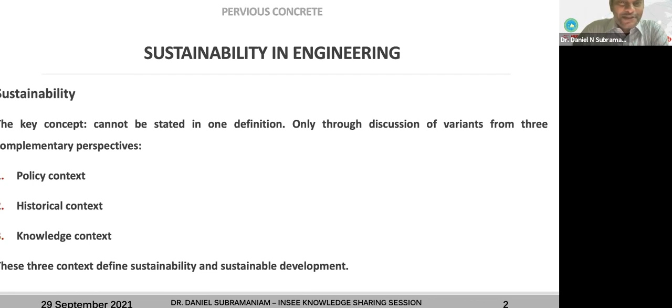So we speak about sustainability, and sustainability is usually spoken of in 3 contexts: the policy, the historical, so how we have developed so far, because we have always been developing from the days that we were hunter-gatherers, and then the knowledge context. Whatever we're going to discuss will be based mostly on the knowledge context. These are the aspects of a modern society, so we have to manage all this. We can't exist in isolation compared to, say, 4 or 5 centuries back.

So we do have markets. We have flow of materials, we have flow of energy, and then we have long distance and overseas trade. Then we have a financial economy, so we had to base all our improvement on that. And we actually felt it with this COVID-19 situation as well, how we came to a standstill because of the economy coming to an end. And then the manufacturing processes, and we rely a lot on the mining process as well, so resources, and the development of new technologies.

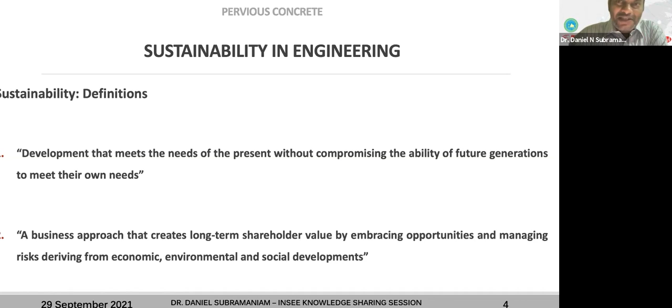And it's not only just developing new technology, we also should be able to share it with the community and the businesses and industry so that it can be implemented. So this is by definition, so I'm not going to dwell a lot on this. So sustainability means that we have to think of our future generations, and they should be able to enjoy the environment as much as we enjoy it. So that's principally the same.

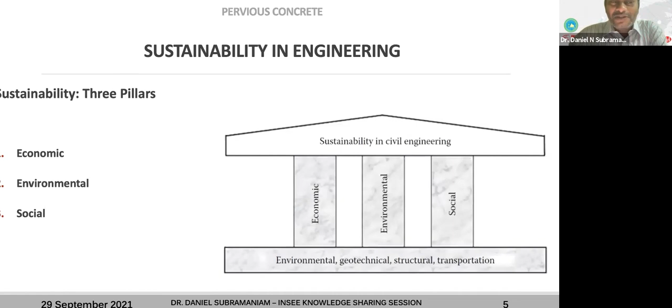And when it comes to sustainability, there are 3 pillars: economic, environmental, and social. So I will be mostly talking about environmental and the economic, but not even economic much. So we'll be talking a lot about environmental sustainability. And I could get this actually from the IESL Code of Ethics. So not only IESL, if you take even ICE or ASCE or wherever, sustainability is actually intertwined into every code of ethics that is available for engineering professionals.

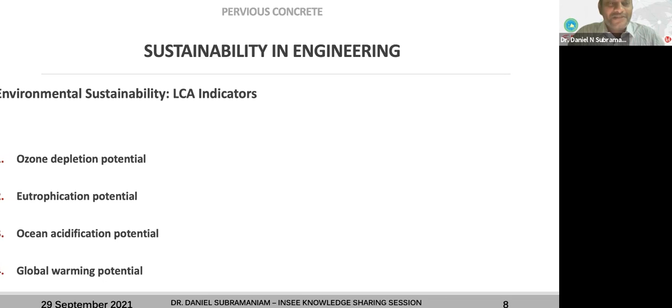Right. So when it comes to environmental sustainability, there are 3 tools that are usually used, which are life cycle analysis or life cycle cost analysis, then ecological footprint and planet Earth system. And out of this, we have common indicators. So usually they are calculated based on the ozone depletion potential, eutrophication potential, ocean acidification potential, and global warming potential, of which the global warming potential is mostly spoken about, which also depends on the carbon footprint. So we will talk a little bit about the carbon footprint of pervious concrete at the end, but I will not be able to talk about the other 3 indicators in this session.

Right. So about green materials, the reason why we actually should go for a green material is to reduce the impact on the environment. And usually it's a comparative analysis, because you can never make anything zero impact. So whatever you do is going to have an impact on something. It could be a positive or negative impact, but there has to be some kind of impact exerted on the environment. So what we actually go for is a comparative analysis, whether concrete is better than clay brick, or whether conventional concrete is better than recycled aggregate concrete. So something like that. And then the examples, so recycled materials, materials obtained from sustainable sources, or lower environmental impact materials.

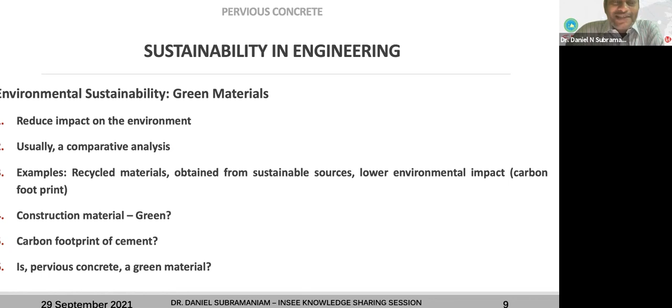And then construction materials, are they actually green? So I have been to many of the sessions of INSEE in the past, and every time they really emphasized this one. And also most of the cement companies emphasize that cement is supposed to be the bigger pollution contributor in the construction industry. And so INSEE has also actually put forth a lot of hydraulic cements, which have a much lower carbon footprint compared to OPC, or ordinary Portland cement. So the carbon footprint of OPC would be somewhere around 1 to 1. So 1 kilogram of cement would have around 1 kilogram of carbon dioxide emission. So is pervious concrete a green material? That is what we are going to look at.

Right. So as I said in the beginning, water sensitive urban design or low impact development is a new concept that has emerged from, I think, the millennium. So around 2000 or 1990s, around that. And what it aims to do is it focuses on the hydrology. Most of the time it focuses on the hydrology, and if you're undertaking a development, then the hydrology of the catchment should be made as close to what it was before the development.

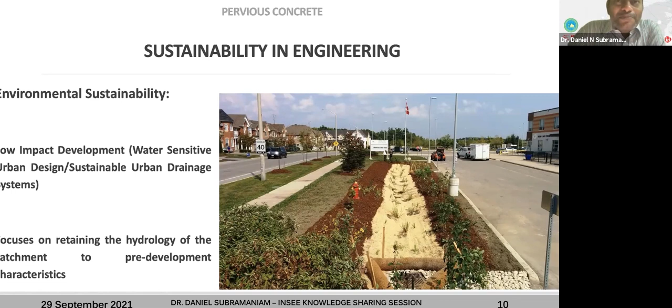And a lot of the streets and pavements and car parks, all of them are made of pervious concrete. So we will actually get into that. So what is a pervious concrete?

Yes, so in my definition, I have almost 0% fine aggregates. As Mr. Jan Koenig said in his welcome speech, sometimes they actually put a little bit of fines in there. That is to enhance the compressive strength most of the time, but that affects the permeability a little bit. So in most cases we want to go for zero fines. We don't use fines at all, no sand at all. We just use cement and aggregates, we mix it with water, and we make the porous concrete or the pervious concrete.

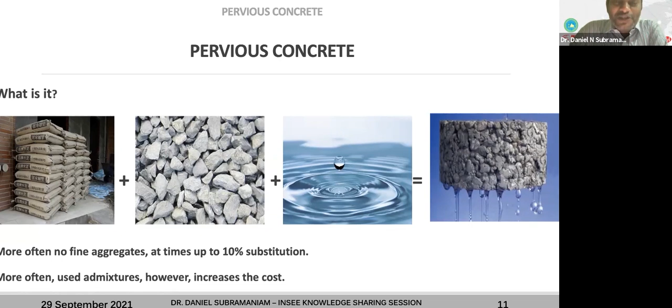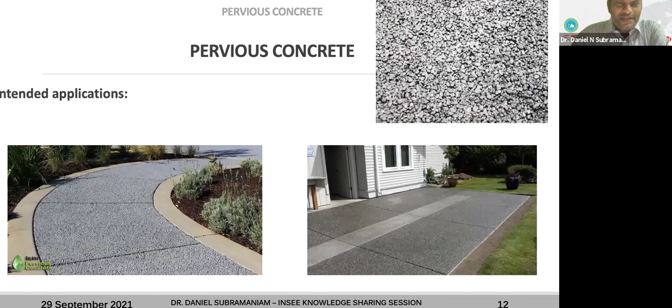So the good thing about this is that you can customize it to any application that you want. That is what we are going to look at today. So these are some typical textures of a pervious concrete. I think that is mostly made of about 5 to 10 millimeter aggregate size particles. And then we have some applications: driveways and lawns, parking spots and byways. And one of the most interesting ones, which I have not seen much of even on the internet, is retaining walls.

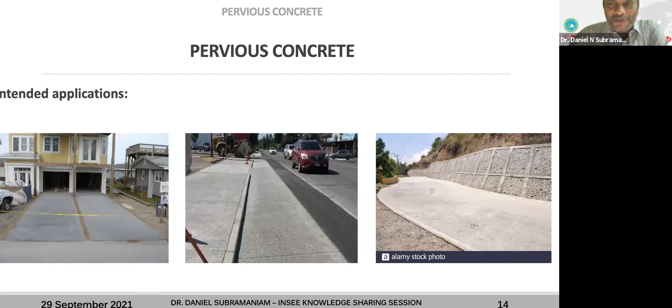So usually we do a conventional concrete retaining wall, and then we have Eslon pipes jutting out to drain the water. I remember one of my friends telling me, though I couldn't find it now, that in some places, even in the south, in the Matara area, people have opted for retaining walls using porous concrete, pervious concrete. But then we have to talk about the designs a bit when it comes to very high, tall pervious retaining walls.

So the primary intention why pervious concrete was developed is to increase the permeability. It is more of a hydrology-related application, right? To enhance the permeability of otherwise impermeable urban surfaces, then reduce flash flood frequency and volume, because if you have a permeable surface, you will reduce the runoff, and that will reduce the flash floods. And then increase the recharge of groundwater. This is one of the most important things.

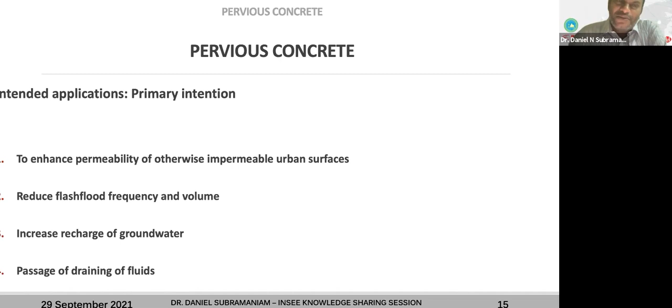If your groundwater is falling, that is going to affect the stability and also the water resources. So we need to have the groundwater, and we should not be altering the groundwater table a lot because of our development. And then the passage of draining fluids. Now, these are some of the other applications which have the potential of using pervious concrete. Out of these, I think I have used about 2 in my research, which are still under analysis.

So we can use them as non-load bearing structural walls. You can design it in such a way that you compromise on the strength a lot because it's non-load bearing, and you increase the porosity, so it becomes very light. That can also act like thermal insulation, because of the many cavities inside the porous concrete of the wall. Also, they can act as noise absorption walls. There are already a lot of research papers on noise absorption on roads, because with the rough surface the noise emanating from the tire-road movement is reduced a lot. So acoustics-wise it is also better.

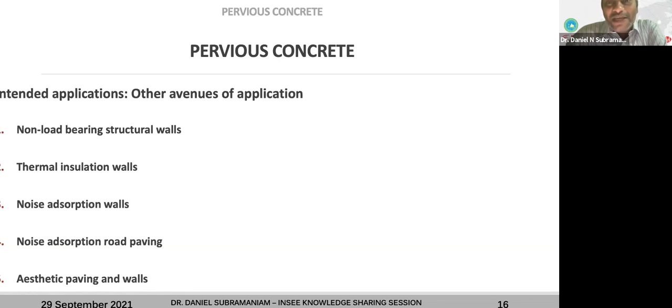And for thermal insulation, we have done research, so we have data, but I'm not going to discuss it today. But it shows some promise that it can reduce heat transfer. For example, you can use it as a partition wall and maintain 2 different temperatures in 2 different rooms at the same time, so you don't have to worry about heat transfer through them. Okay, so the general observations.

You can come up with a compressive strength varying all the way from 1 megapascal to about 120 megapascal. The flexural strength can be around 0.1 to 20 MPa. That all depends on your design, so we will be discussing that a little bit. Then the porosity, the most important factor in a pervious concrete, which can vary from 5, and sometimes, in my research, all the way up to 45%. So that's a huge volume of pores inside.

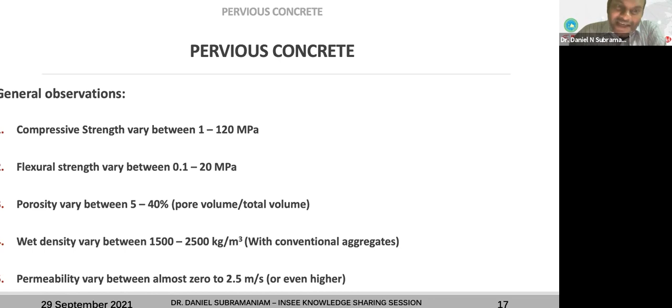And the wet density can change anywhere between 1,500 and 2,500, and permeability can be almost 0 if you do a lot of compaction, or go even much higher than 2.5 meters per second. So that all depends on how you're going to design it. So what are the challenges?

Pervious concrete has been used a lot in developed countries for roads and pavements. Everything I showed is from abroad, nothing from Sri Lanka. So why is it not applied in Sri Lanka is one of the questions I always ask. It has a lot of potential, but it is limited in applications.

One of the biggest problems is uniformity, because it's a porous structure. Every time you do a mix, because you have zero compaction or slump, you end up with a different arrangement of binder-coated aggregates. You don't have fines, so you don't have a binder with a fluid property. In conventional concrete, we speak of concrete as a fluid, to be precise a Bingham plastic fluid. You give some yield stress, and after the yield stress, it behaves like a Newtonian fluid.

The problem with pervious concrete is that most of the time it has zero slump, so workability is zero. That's one reason why you don't see much uniformity in production. If you're going to do industrial applications, you need to mass produce, and mass production must have uniform characteristics. If not, it's going to have a problem. That's one of the issues we had in applications.

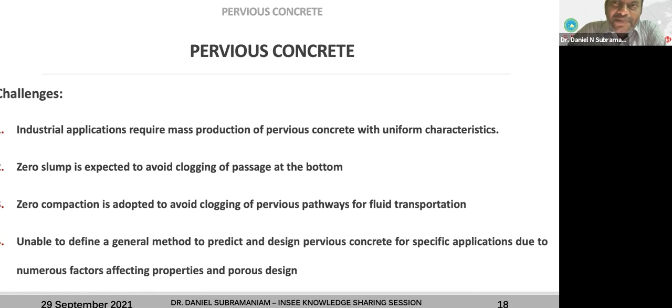As I showed in the previous slide, it varies so much. We still do not have design methods like we have for conventional concrete. Quantifying the porosity of concrete is still very uncertain. I'll be discussing this a lot in the research—it requires an immense amount of experiments prior to applications, because we don't have a proper design system.

We need to do a lot of experiments before every application. Even every batch needs to be tested a lot. Because of that, we also have a lot of wastage. If the properties change a lot between two batches, then we have to waste them. That is another challenge that we have.

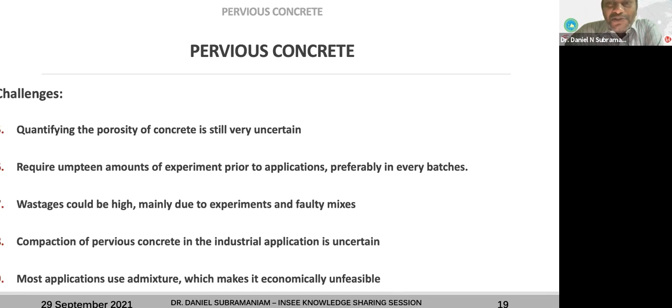Compaction of pervious concrete in industrial applications is uncertain, and most applications use admixtures, which makes it more economically unfeasible, because most of the time in developed countries they simply use admixtures. Even in studies done in the UK, USA, or Australia, they tend to use some admixtures. But if you're going to use it in Sri Lanka, for example for a road or pavement system, we will not be able to use admixtures because it will be very costly—we will not be able to bear the cost.

Regarding uniformity and characteristics—what is the challenge to mass produce with uniform characteristics? I've already spoken about this. When you do mass production, every batch you make must be consistent. If you vary the strength or porosity of the concrete between batches, you will not be able to use it for the same application, so you'll be wasting a lot.

The policy of zero slump and no compaction are to blame. Zero slump limits the flow of concrete, which is required to avoid clogging of the bottom surface. Also, because we have a no-compaction policy, and the slump is zero, the aggregates don't get rearranged. The way you pour it, it'll stick—it becomes a very zero slump concrete.

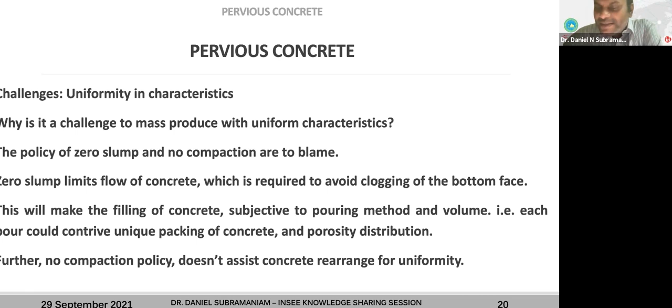You can just think about that—when you pour it into something, it will just stick like that. It's not going to move about or rearrange, so it becomes less uniform. That is the actual cause for the non-uniformity. It will be hard to attain the same porosity with the same mix design due to zero slump and compaction.

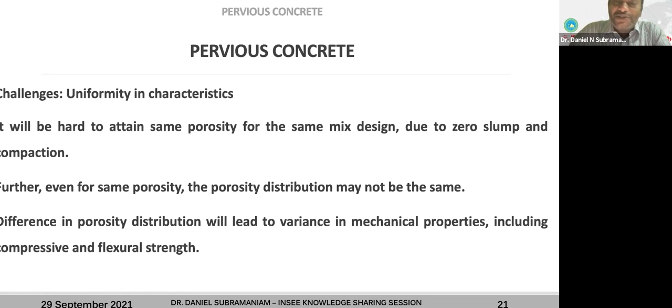So even for the same porosity, the porosity distribution may not be the same. We may have all different mixes happening at the same time, and you might get the same porosity in your experiments but different compressive strength because the porosity distribution is not the same. So difference in porosity distribution will lead to variance in mechanical properties, including compressive and flexural strength.

So what are we actually trying to do? We have to be able to predict the performance of cast concrete based on design parameters, before it actually goes into the application, at least to some certain level. The uncertainty arises due to random errors or unaccounted extraneous factors.

For example, if you're considering design factors like aggregate cement ratio, water cement ratio, and so on, all of a sudden climate might play an important role which is not in your models. So that has to be rendered into the models. Higher uncertainty leads to higher failure in prediction, or higher prediction bounds.

In addition to challenges in attaining uniform characteristics, porosity distribution and its characteristics contribute to uncertainty that is less studied. Most of the time we can't cast so many concrete samples. Concrete is already an uncertain material, because depending on the day you cast, whether it's rainy or dry, whether humidity is high or low, it's going to affect the concrete in some way that's not recorded or included in the models.

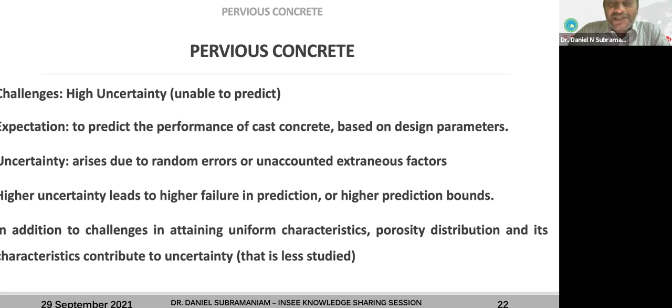So with that uncertainty, if you're talking about more uncertainty with fewer samples, then the model predictions go way above the limited levels.

When you look at this picture, assume all these have the same porosity. When you compute porosity, it's the volume of pore divided by the total volume of the cube.

Now if you assume all three cubes have the same porosity, the distribution is completely different. There are two things we can talk about: one is spatial distribution. In the first cube there's one pore in the middle, in the second we have four equal sized pores equally distributed, and in the third, C, you have different sizes of pores with different spatial distributions.

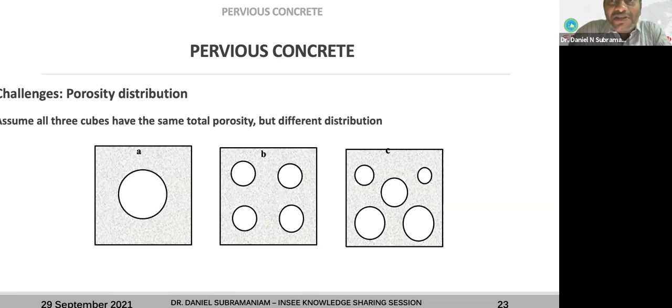So these are not going to be the same - they won't perform the same way as you'd expect in the application. Most studies haven't actually taken this into consideration. That's one of the properties we'd like to analyze.

After this, the quantification of porosity - I'll talk a lot about this later. We're actually talking about five porosities here: measured porosity, calculated porosity, total porosity, effective porosity, and connected porosity, which contributes to the permeability.

Measured porosity is the standard method where you dip the concrete into water and measure the displacement of water, the volume of water that is displaced, and from that you can find the amount of porosity.

The calculated porosity is calculating the volume of pores depending on the volume of constituents used. We know the mass of each constituent, divide by the density to get the volume of each constituent, then from the total cube volume, if you deduct it, you get the volume of pores.

Total porosity is actually using image analysis, which I will explain later.

Effective porosity excludes the boundary effect we get on the top and bottom, because when we cast in the laboratory, we cast in molds, and the molds have a rigid surface, and that rigid surface induces a boundary effect. We will talk about that later.

The connected porosity is something we still couldn't find out, because we are measuring permeability separately, but we won't be able to talk about connected porosity since it's a 3-dimensional effect.

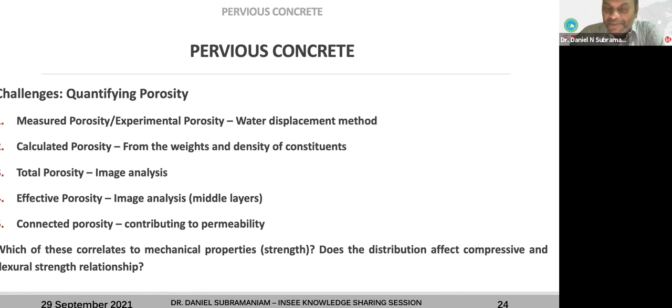So which of these actually correlates to mechanical properties? Does the distribution affect the compressive strength or flexural strength relationship? If you look at this picture, pores A and F are actually in the middle of the cube. They are not exposed to any sides.

If you dip this concrete cube into water, it is not going to enter A or F. The water will enter through B, C, E, and D, but not A and F. So when you compute porosity, A and F will be considered as solids. The measured porosity from experiment is going to be an underestimation of actual porosity.

If you take parts D and E, yes, they will be exposed to the surface, so they will be included in the measured porosity. But compared to B and C, D and E are not going to contribute to permeability because they don't let water transfer through - they let water enter, but not transfer.

So it has to be B and C, but even C is not going to contribute to permeability because it's on the cross-sectional side - it's vertical to the fluid flow we are considering. So only one type of pore is actually going to contribute to permeability.

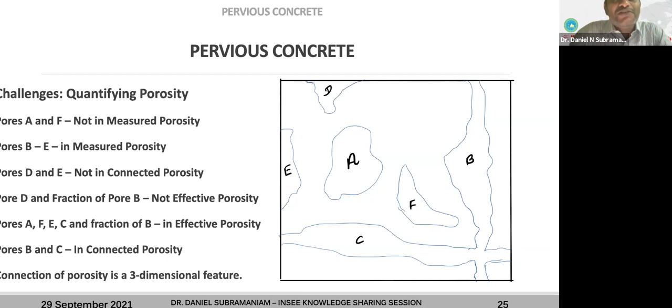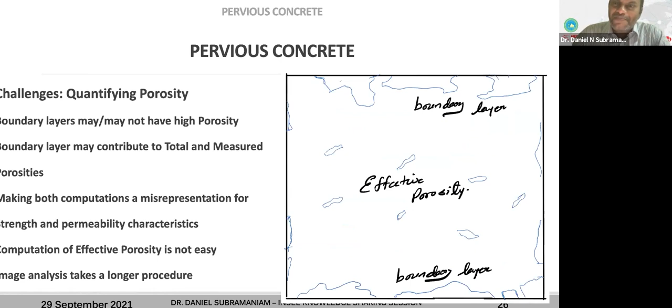So how are we going to do that? This is also something we found in our research - there is a boundary effect. If you take the total porosity, say it's about 0.3, what we found is that a major fraction of the pores are actually in the sides, in the boundaries. So what you have in the middle is significantly less, say around 0.2. We call that the effective porosity, and the other one the porosity in the boundary layers.

When we talk about permeability - in the previous picture, if the pore is connected from top to bottom, then it will contribute to permeability. But the problem is permeability as a number doesn't depend only on the connection - it also depends on the size of the pore.

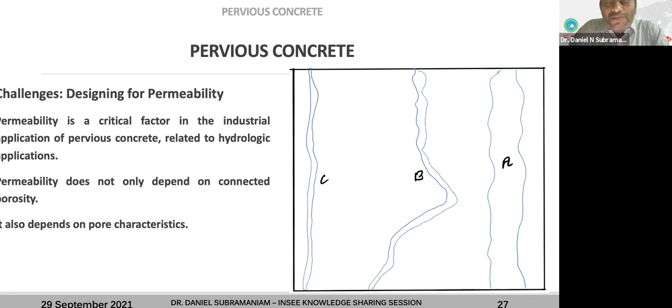Because of capillary effect and surface tension, everything plays an important part, so it's not a linear relationship between pore size and permeability. We should be able to develop some understanding, because permeability is a big question even in unsaturated soil mechanics. We don't usually teach that in university, and sometimes we tend to just use it as a constant. But actually you should be able to model it with probability distribution functions.

The important one - something I came across recently which I found very interesting in research papers - is this ITZ, the interfacial transition zone. If you take an aggregate coated by cement or binder, there is a layer in between the two, called the ITZ, and that affects the mechanical properties of the concrete a lot.

Most of the time we do microstructural analysis for this. What I found interesting is that the absence of fines in pervious concrete is actually an added advantage in the ITZ analysis. But I'm not very sure, since not many researchers have studied this - we are also trying to do something in the future. So it actually alters the ITZ.

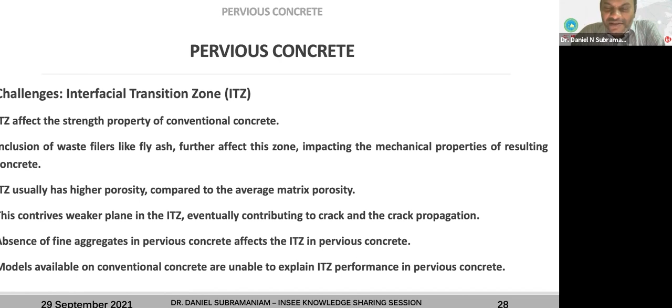The thickness of the ITZ and how much it contributes to mechanical properties matters, because they also found that most of the time cracks propagate through the ITZ. So our focus should be on enhancing the ITZ more than what we have in the matrix, the rest of the binder.

So the current research avenues, what we find in the contemporary literature, are mostly looking at some kind of relationship models, most of the time empirical models. So porosity versus compressive strength, and aggregate size versus porosity and compressive strength. Then gap grading of aggregates: rather than just using one size of aggregates, you can use, for example, 5 to 10 and 20 to 25, so that you can mix them.

And the inclusion of waste fillers like fly ash or rice husk ash. Then coir is used, sometimes coconut shell husks are used, so there are a lot of other waste materials. And then there are fibers used inside the pervious concrete, and the use of admixtures. I personally do not suggest the use of admixtures because of the cost in Sri Lanka.

And the other basic research uses the usual experimental cubes as samples. But the problem is that they use a very small number of samples, so it doesn't address the uncertainty that is affecting the findings. And one of the tools they're using is CT scans and X-ray methodologies, and they are very costly. To take one picture you have to spend a lot of money, so you will not be able to cast about 6 repetitive samples and take 6 pictures, because that's going to incur a cost.

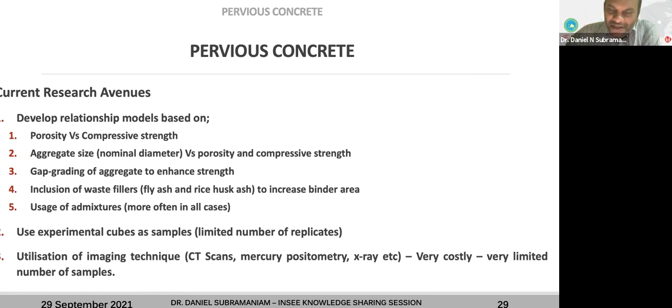So as I said, they are using mercury porosimetry, X-rays, CT scans. The other problem we found with image analysis is that converting the image to a binary or tertiary system involves a lot of algorithms, and the algorithms have a lot of issues with uncertainty. You are either overestimating or underestimating a pore. You will not be able to get the correct pore sizes because of the color codes. So we have used imaging technology using normal digital cameras, but we had to do a little bit of preparation of the samples.

Okay, so what are the limitations in generalizing the studies? People have done a lot of studies developing models between porosity and compressive strength. But as I explained before, porosity alone is not going to dictate the compressive strength, because the porosity distribution is another factor, pore size is another factor, pore shapes are different factors. All that has to be factored in. So there is a lot of uncertainty around that. One study's model will not be used by another study, depending on the aggregate characteristics, shape, size and distributions.

That's making the generalization of models very challenging. There is a lack of analysis and understanding of the propagation of uncertainty, which is very important in research and for proper application in the industry, unawareness of the pore characteristics that mostly contribute to the uncertainty in data and model predictions, and usage of high-tech, high-cost imaging techniques. And then a lack of understanding of image analysis techniques, which are algorithm dependent in transformation and analysis of images.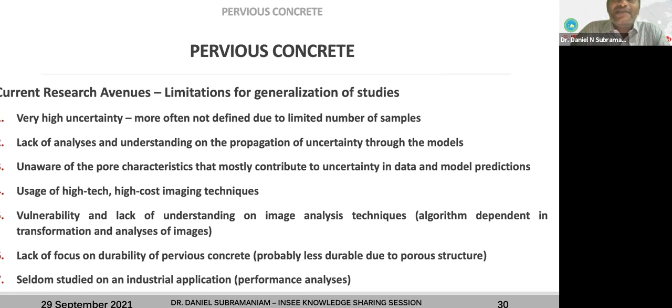Then lack of focus on durability. I noticed in the current literature that durability is very seldom analyzed in porous concrete, probably because we are still in the early stages of research in pervious concrete. Once we are done with that, we should be able to get into durability. But as Mr. Jan Koenig said, pervious concrete is quite durable, so we don't really have to worry about that, but it also depends on your design. And it is seldom studied in industrial application. This is something I would really like to do, to apply it somewhere and see how it performs at natural scales.

Right. So those are actually in the current context that we used. So this is a little bit about what our research is. So we have actually focused on these 7 things. I have done research on pervious concrete for the last around 8 years. So ever since 2014, I have been involved in pervious concrete, but I have not done much publication. The reason is I want to collect ample data before I start doing the analysis. So now that I have got the data, these are some of the experiments I have already done.

So I have looked at reducing the uncertainty mainly by design parameter optimization. I don't want to get into these admixtures and things like that. So one of the tools that I used is using the proper aggregate size and a degree of compaction that can induce some kind of uniformity in pervious concrete without compromising the permeability itself. And then we analyze the pore characteristics, porosity characteristics, and optimize design parameters such that uncertainty is reduced in tandem, including usage of filler materials.

Then we have used a lot of different analytical tools, including some machine learning methods as well, to develop robust mathematical models to predict and consider various applications. So I'm not actually looking just at pervious concrete as a pavement structure. I'm also looking at non-load bearing structural walls, where I'm also talking about the heat transfer and the sound penetration through those. So I'm doing some analysis on that as well. And then we are actually talking about the boundary layer and durability as well.

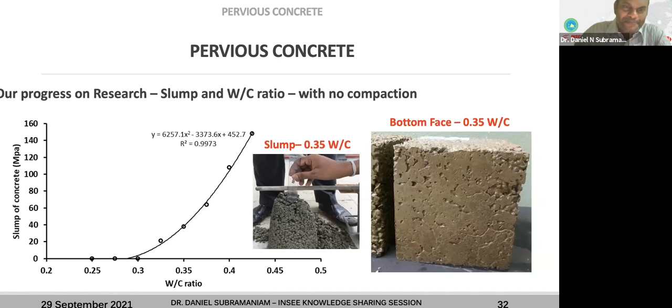And you can see that the bottom surface is completely filled. So it doesn't actually contribute to permeability. So no matter how much you design, it's not going to act as a permeable concrete. So you can see now this slump at 0.35 is only about 40 millimeters. So the 40 millimeters is actually causing this much trouble. So that is one of the reasons why in the research also they have proposed that the slump has to be maintained almost 0. So when the slump is 0, then you can think about the flowing conditions of pervious concrete.

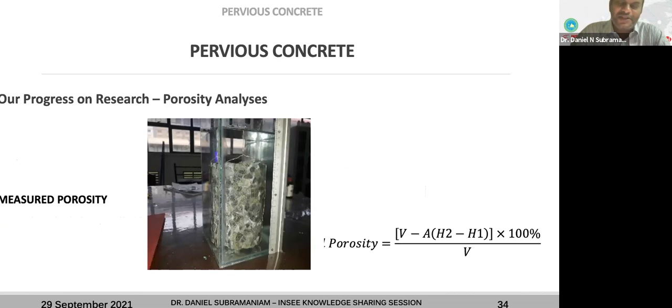And this is about the porosity analysis I was talking about. So I'll go one by one so that you will get some idea. So this is the method of measured porosity that I was talking about, the experimental way. You find the height of the water level, and then you dip the concrete in, and then you take the difference of the water level. That is going to give you the volume of water displaced, which will be the volume of solids in the concrete. So you have to deduct it from the total volume, and then you will find the porosity. So this is measured porosity.

So this is the image analysis that I was talking about. So you can see here, we cast the cubes, and then we take the core samples. Each core sample is 100 millimeter diameter. And then we actually spray paint with the black color, and then we hand paint the cut surface. So you have a distinction between the pores and the solid surface of the curved surface of the core.

And then we take a panoramic view of the digital image. Sometimes we use phone cameras, iPhone cameras, or sometimes now we are actually using the Sony A7 III digital camera, which are economical cameras. And then we actually convert them to binary.

So we don't have a big algorithm for this because it's already in black and white almost. So it's very distinctive, so we reduce the uncertainty a lot in this case. And then we do the cropping and we do the binary imaging, and then we calculate the area of black versus area of total.

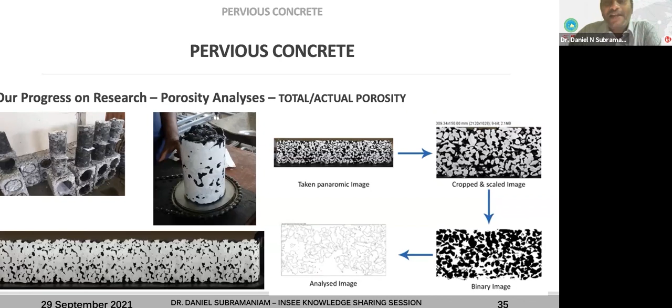So the black ones are, not the aggregates, sorry, the solid surface. So that will give us, the rest will give us the pore. So I think the black is the pore and the white is the solid surface. So from there you can calculate the total porosity.

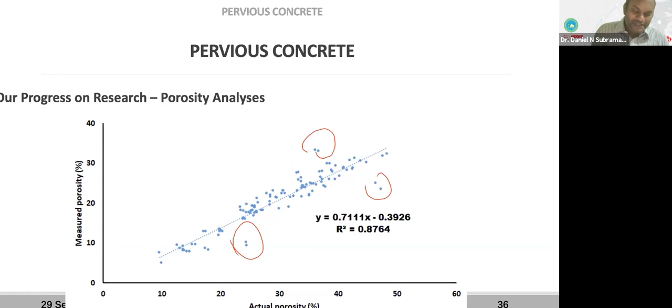So these are some of the observations we found, that there could be a lot of uncertainty. You can see here, there is some uncertainty on this part here, and then we have some there as well. So there is a lot of uncertainty which cannot be explained. So that's one of the reasons why we wanted to go for a more robust method in analyzing.

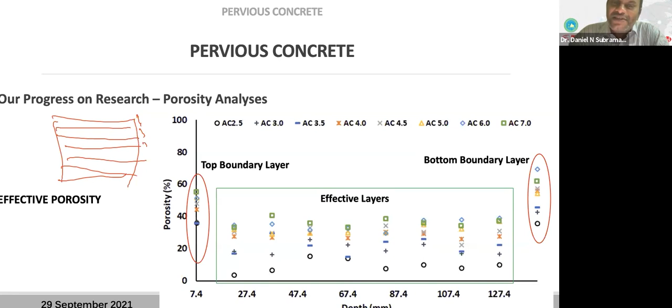So you can see there's a significantly higher porosity in the top and the bottom layer, here and also at the end. But if you look at the middle layers, they're almost constant, but they vary with the aggregate to cement ratio, and also with compaction. But for a particular given sample, they are most probably constant. So this is something that we call the effective porosity.

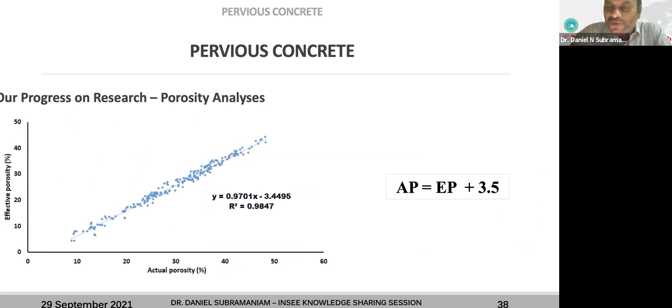Okay, so now this one is giving us the relationship between actual porosity and effective porosity. So you can see the uncertainty is much less. We have reduced it so much that we can depend more on the study, on developing the models.

And then the next one that we really need to identify in pervious concrete compared to conventional concrete is the aggregate packing. Because in a conventional concrete, the pore space will be filled by the matrix, the fine aggregates and the binder. So you're definitely going to have some kind of support in all directions. But porous or pervious concrete is very skeletal. So the skeleton must depend on the aggregate packing, any kind of particle packing.

Now, in this case, we can talk about binder coated aggregates. Each sphere can be considered a binder coated aggregate. If you pack the aggregates in an optimum way, beyond that you will not be able to pack further. For example, in materials we learned atomic packings: BCC, body centered, face centered, HCP, and so many others, a simple cube. Beyond that point, you will not be able to pack it further, so the pores will remain free.

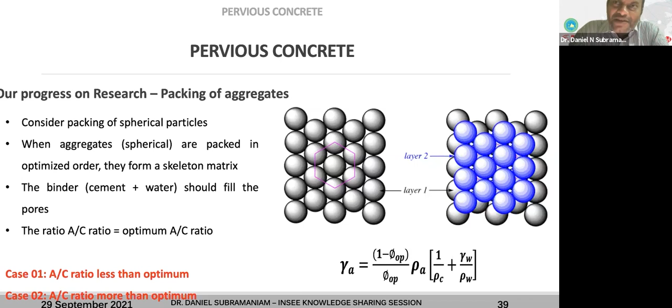Now, for a pervious concrete or a conventional concrete to have an optimum aggregate to cement ratio, when all the aggregates are packed in an optimal way, the binder should be able to occupy all the spaces in between. So based on that concept, we should be able to have an optimum A/C ratio for any pervious concrete.

So if you have an aggregate to cement ratio less than the optimum A/C ratio, when you are compacting, the aggregate particles will move closer to each other and squeeze the binder out of their path. With a lower ratio, you will have more binder in the cube, so the excess binder will be evicted from the cube. So even though you use an aggregate to cement ratio of, for example, about 1, if you do the compaction, you will end up with the optimum aggregate to cement ratio.

So you will never be able to keep all that inside, right? But on the other hand, if you use an aggregate to cement ratio which is more than the optimum, then no matter how much you compact, you are not going to get to zero porosity, right? So that is a concept that we developed.

Now when it comes to aggregate packing, you will also have a lot of impact. Now we assume all this of BCC, FCC, and all that, considering that it's going to be spherical particles. But in the general sense, it's not. They are not spherical. They are very shapy, for example flaky, elongated, and angular particles. So they are not going to have the same packing as you would expect, like you put some marbles into a jar.

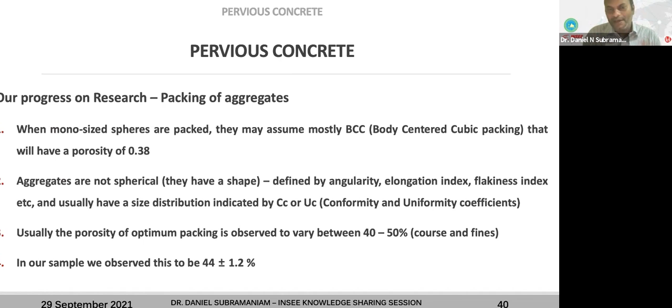So the aggregate shapes and size distribution are actually well defined in geotechnics. We use the parameters a lot in geotechnics. So in the aggregates that we used, the porosity is about 44 plus or minus 1.2. Based on that, we calculated the optimum A/C ratio to be 2.36 for our studies. So anything more than 2.36, you will never be able to get zero porosity. Anything less than 2.36, no matter how much you put, with compaction it's going to come out.

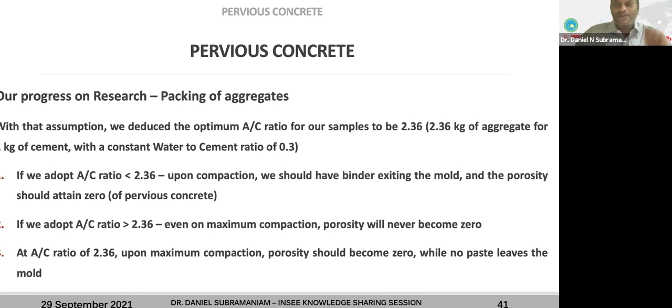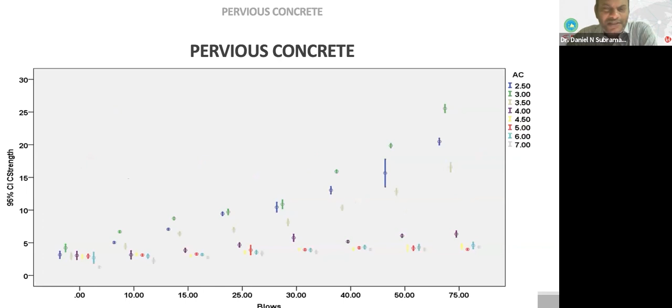One of the reasons is you can see here that no matter how much compaction we do, we will not be able to get anything less than 0.1 porosity, right? So for the mixture that we have, no matter how many blows we give, we will not be able to get less than 0.1 porosity. So that's one of the reasons contributing to a higher optimum A/C ratio.

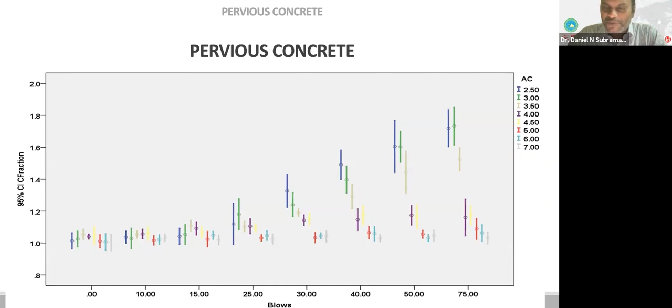So this is showing us the fraction of actual porosity and computed porosity. Here also you can see that a distinct pattern is there between 3.5 and 4 A/C ratio. So therefore, we come up with an ideology that somewhere there the optimum is happening. So putting more than 4 is not going to help you with the pervious concrete. So this is again showing the apparent, the measured porosity and actual porosity.

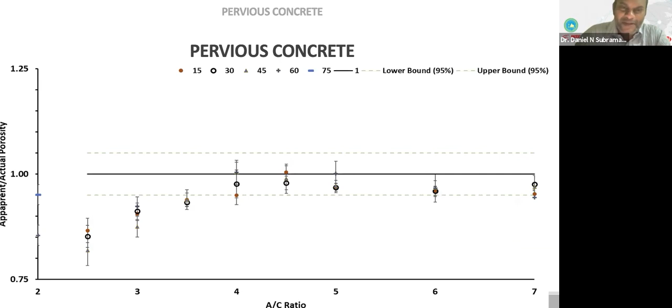And you can see beyond 4, it's stabilized, a lot stabilized. But before 4, there is a big difference. So porosity could never reach 0%. And aggregate size distribution and aggregate shape affect the packing of aggregates and the matrix of the skeleton of pervious concrete. So the aggregates do not necessarily come into contact with each other.

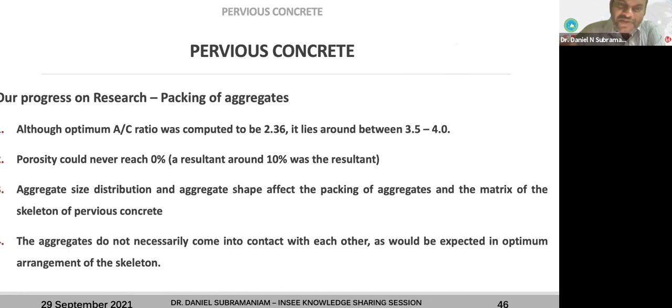Now, our exact concept would be like 2 aggregates, when you give compaction, they will move with each other and they will come in contact with each other. But in pervious concrete, in the actual situation, it doesn't happen. So they will have a resultant thickness of binder in between them. So because of that, we will not be able to get to that 2.36 optimum AC ratio.

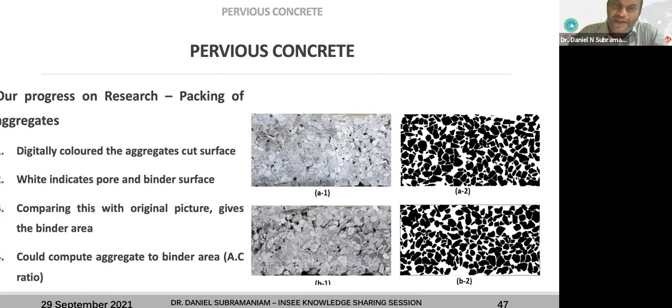And when we did that, we found out that for higher AC ratios of 2.5 or 3 or whatever, when we did the compaction, it actually became around 4. So you can see that with compaction, it actually comes to somewhere around 4. Beyond 4, it's going to increase anyways, because the binder will not exit the surface. So this is one of the important things that we found out, because there's no point doing anything less than 4 AC ratio, and you're not going to get the permeability also.

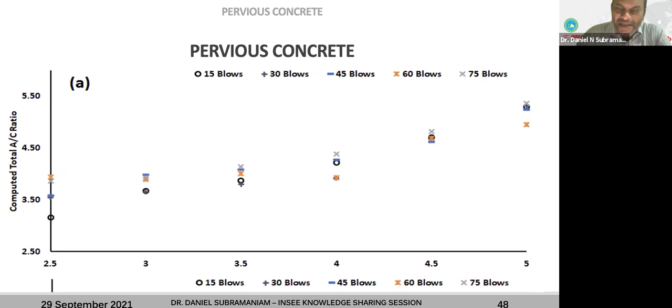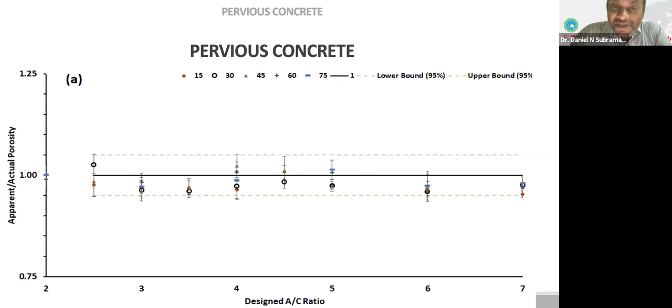So when we did the adjustment, we found that they are all somewhere around 4. So they actually come to apparent versus actual porosity. Earlier we had a bit less in the lower AC ratios, but then we found out that everything comes within the 95% confidence interval.

And then we have optimization of compressive strength. Compressive strength can be optimized using aggregate characteristics, AC ratio, water cement ratio, and compaction. Water cement ratio we are going to keep at 0.3; it is almost universally accepted. And small aggregates lead to higher strength. We actually got up to about 25 megapascal without any compaction at all, with small aggregates of about 2.36 to 5 or 8 millimeter particles.

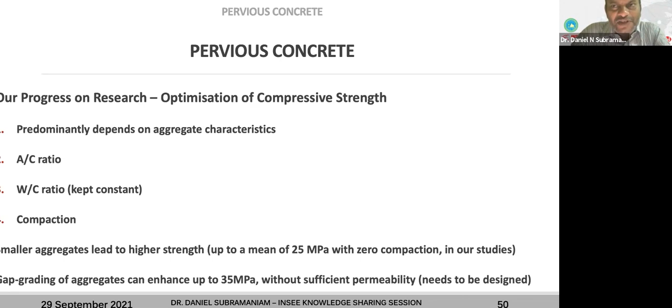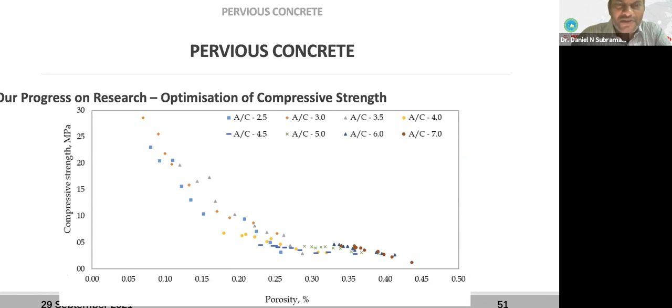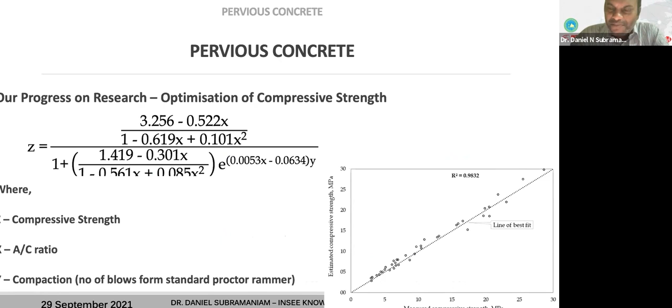So this is another model that can predict the pervious concrete porosity and compressive strength. This can be depicted by a mathematical equation this way. You can see the very good fit as well, and you should be able to predict the outcome before any mixing. This is another model that is also available to predict the compressive strength based on the porosity, which is a widely used model for porous material.

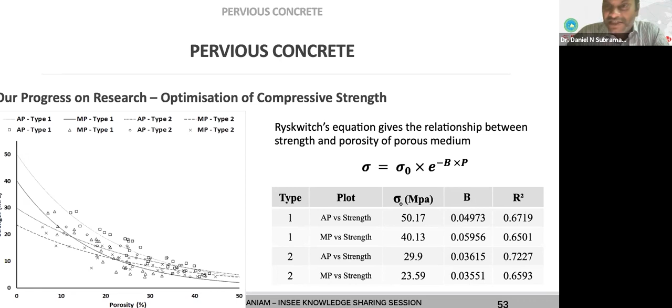For example, powder technology. The Ryskwitch equation is actually applied for powder, and it is also applied for porous concrete in some studies. So that's why we went for this, and we found out that they also satisfactorily predict.

And if you have both layers together, out of 150 millimeters, about 50 millimeters is gone in the boundary layer. This is not acceptable in many cases. So when we are doing the laboratory study, we should be mindful about this boundary layer impact. But then one important factor that we noticed is also the compaction.

Now, I did not talk about compaction in the earlier ones. Compaction of about 30 blows with a standard Proctor rammer actually gives a uniform property. So you can attain a more uniform porous concrete mixture with 30 blows of compaction, and it doesn't reduce the porosity either.

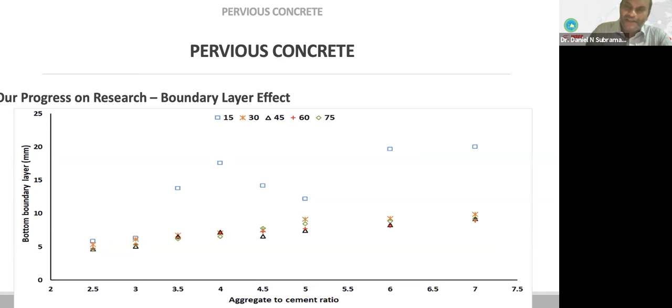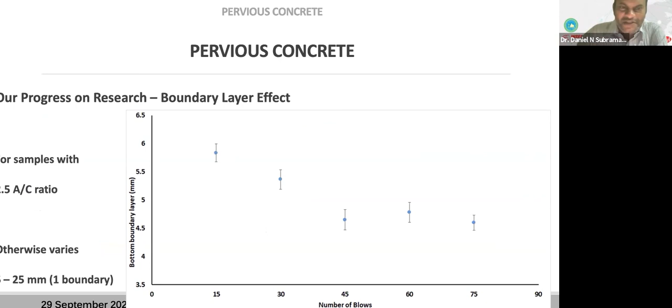So this shows that a compaction of 30 blows yields more uniform production of pervious concrete rather than not having any compaction. This shows the variation with the number of blows: at 30 or 45, somewhere in between, and after that you see a stagnant level.

This is for the top boundary. What we discussed earlier was the bottom boundary layer. Now this is about the top boundary layer. The top is not impacted because of the rigid surface, since there's no surface on top. This is the effect of how we pack.

When we are closing the cubes, what we do is put some more and then try to flatten it. So that is the effect. We can definitely see that it does not vary with compaction or aggregate to cement ratio. Nothing affects it, and it's about 5 millimeters on the top.

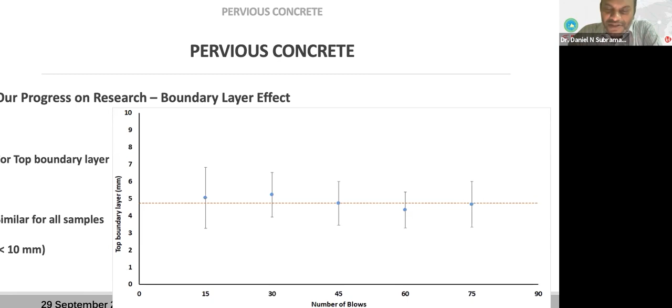This is important in industrial application, because the bottom layer is not of much concern—unless you put it on a compacted soil layer. If you put it over an unbound layer, it won't affect much, and the boundary layer will actually be reduced since it's not a rigid surface. But the top boundary layer needs to be accounted for, depending on the industrial application.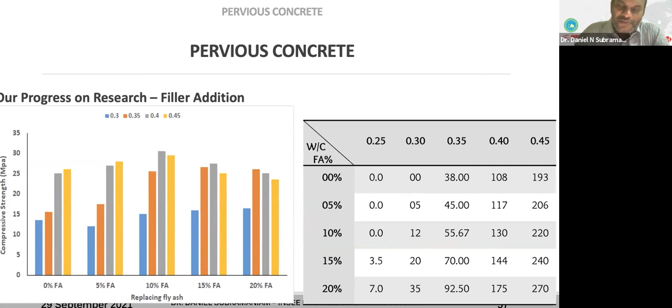But for this study, we used OPC because we are substituting with fly ash. In the future we should be able to do it with hydraulic cement as well. Instead of just one ash, we thought of adding fly ash and rice husk ash together so the total substitution is 10%. We don't want to go more than 10% substitution, so we kept that as a benchmark, using two different ashes to see whether we can get a higher strength.

We found we could attain about 20 to 21 megapascals with 10% RHA. Another point to note is that these have no compaction at all—we did not compact the concrete with filler addition. These strengths are attained without any compaction, with very high permeability, so there's a lot of room to increase this strength even more without compromising the permeability. For this one, we used aggregate sizes of around 8 to 12 millimeters.

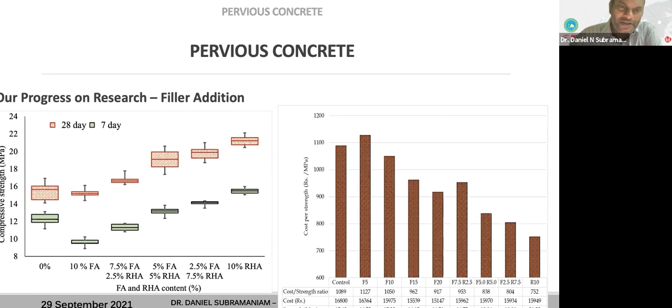This is showing the compressive strength. F is indicating fly ash, and R is indicating rice husk ash. Again, no compaction in this study. You can see that rice husk ash addition is actually helping a lot with enhancement of the compressive strength.

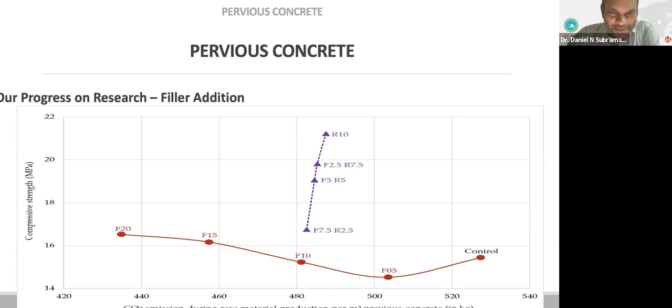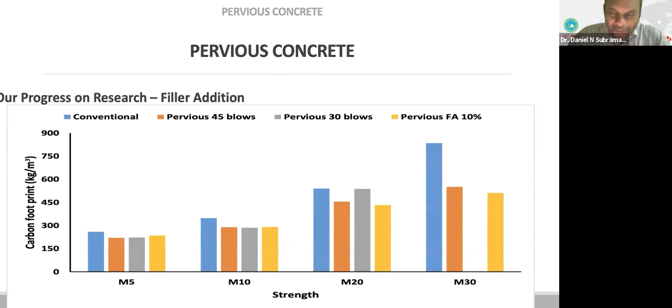When we look at the carbon footprint, we also see that conventional concrete is imparting a bigger footprint than you can achieve with pervious concrete or the alternatives that we have. So these are some of the things that I wanted to show.

The research is in progress, as I said before. We have all this data that we are analyzing, and we are trying to develop a model that could predict the performance of the concrete entirely from the design parameters. We have considered a few parameters, but we aim to include more so that it can be a robust model. That's probably something we will be able to make soon.

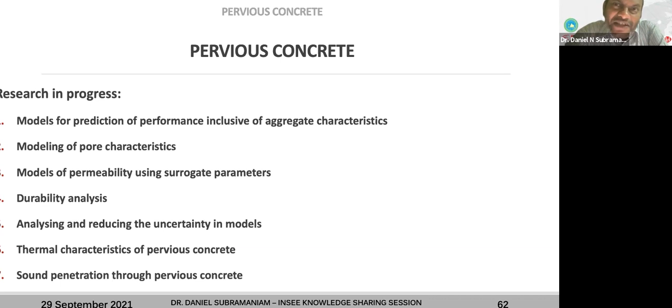We also have durability analysis in progress, and we want to publish on the durability, thermal, and sound properties of pervious concrete. Definitely, one of the important things I really look for is the uncertainty. I would like to, at least, if not reduce, define the uncertainty in the models so that any user who applies them would be able to understand the probable fractions relevant to their application.

Right, so that's all I just wanted to say.